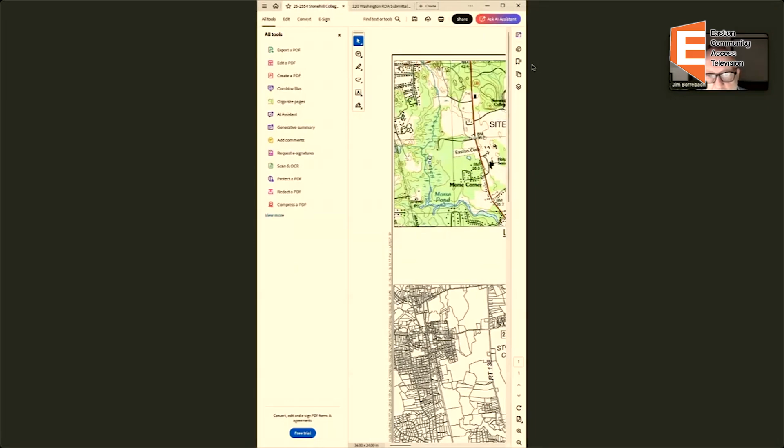Thank you. Is that visible to everybody? Yes, but you'll have to zoom in. Is that good? So I can see the locus map, but if you wanted to show us details of the bridge, you'd have to move your screen to the right a little and zoom further. Uh-oh. Now my Zoom skills are being tested and noted to be coming up short. Not noted, we do this most meetings. Can you see the plan as well as the locus map at this stage? I see the plan, yes.

Okay, so off to the right is Francis Hurley Way. That's where we'll be getting access. You can see the footbridge is right where my cursor is showing. There's a couple of existing abutments on each side. The BVW is from Mass Mapper, and we showed the 100-foot buffer zone. It is in flood zone A, as you can see from the plan.

So the bridge would be reconstructed with wood by hand. There was a couple of small areas where some asphalt had been pulled up as part of the initial work for this narrow section. We propose to replace that at the pre-existing grade, so no fill would be placed inside as part of the work.

We're showing erosion control extending a little bit further on the Francis Hurley Way side, since we'll be accessing the work site from that location. The erosion control barrier would be installed prior to starting any work. We're showing it overlapping the end of the abutments, on the landward side, by a couple feet so that we don't have gaps there. We use the town's detail for the erosion control barrier. We're requesting that you folks issue a negative determination.

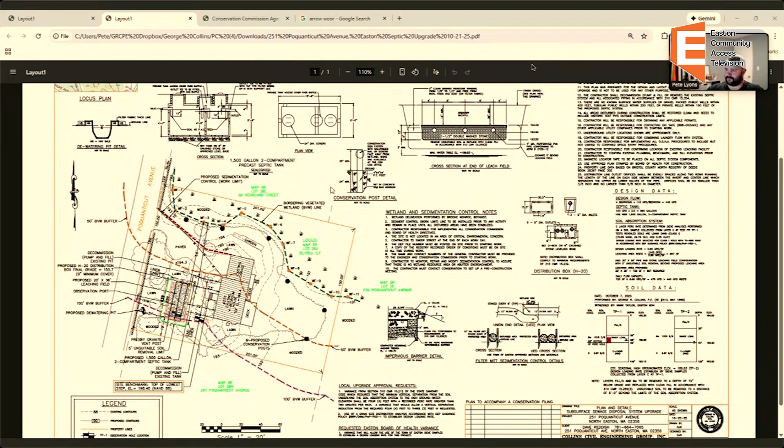Good evening, can you guys hear me and see my plan tonight? We can hear you and see the plan. For the record, Peter Lyons with Collins Civil Engineering Group. We're here tonight for a notice of intent relative to the repair of a failed septic system at 251 Poquanticut Avenue. I'll zoom in on the plan, and we can see the rectangular property with wetland flags 1 through 11 delineated on site to the north of the lot.

The 50-foot buffer basically bisects the property, and the 100-foot buffer falls down on the south corner. Our proposal is to replace the existing septic tank with a new 1,500-gallon concrete tank to a 20 by 36-foot leaching field, which would not be a pump system, but a slight elevation change of approximately 1.5 feet above existing grade. To accommodate the new leaching field, we're looking at removal of one larger tree, about 15 to 18 inch diameter, right in the middle of the system, approximately 75 feet from the resource, and some minor vegetation clearing, overgrowth creeping into the lawn at the southern end, outside the 100-foot buffer.

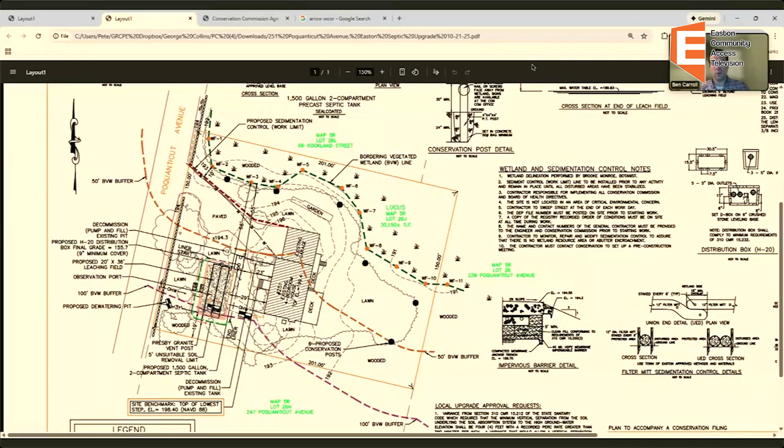Seeing none, Pete, I assume you'd like to close? Yes please, motion to close the public hearing for 251 Poquanticut Ave. Second. Crossman, second, thank you Nate. Carroll, motion; Crossman, second. Roll call vote: Carroll aye, Crossman aye, Goodman aye, Spady aye, Vecchio aye.

Motion to issue an order of conditions and permit for work for 251 Poquanticut Ave. Vecchio, second. Carroll, motion; Vecchio, second. Roll call vote: Carroll aye, Crossman aye, Goodman aye, Spady aye.

Up next is 10 Lantern Lane, which is a notice of intent for deck construction.

All right, that one is me again, let me pull that up. For the record, Peter Lyons with Collins Civil Engineering, representing the homeowner at 10 Lantern Lane. This would be the third somewhat recent NOI on this project. We just closed out the last one for replacement of the septic system and some site work, including a new driveway. Part of the old proposal and COC issued in the fall was a significant amount of plantings and getting the lawn in good shape. I think the owner has done everything above and beyond to meet the satisfaction of the commission as far as the existing state of the site. They are coming back requesting a 12 by 14 foot deck on piles off the back right of the property, just inside the 50-foot buffer.

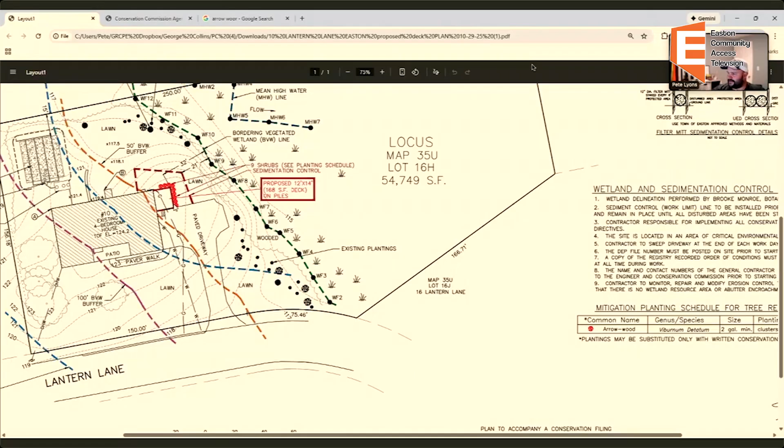The waiver that was submitted, due to the work and the placement within the 50-foot buffer, describes the public good section here. Give me one second. What do we do with this? Basically, the public good is this area - it's going to be an outdoor area to promote social gatherings.

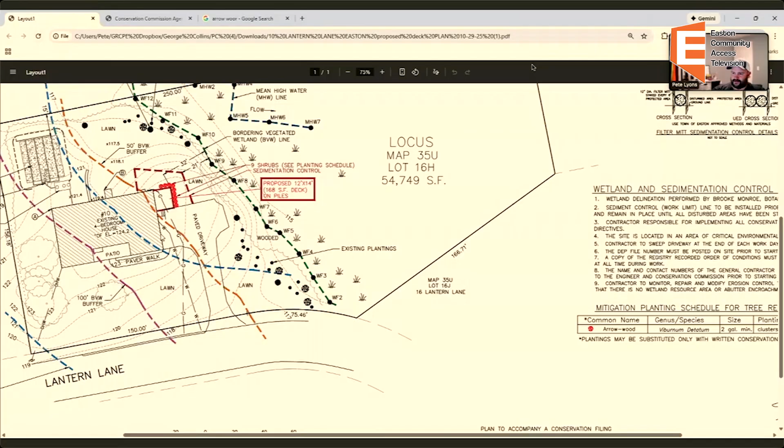Also getting people outside, out of the house and into nature is kind of the thought of this. With all the recent plantings, it's turning into a beautiful property, with the new stuff as well as the wooded area behind it. So the client's just trying to utilize the existing yard, but also take advantage of the nature that they're placed in. So that's kind of our comment as far as the public good.

There are existing conservation posts already on site, so we haven't proposed any additional. We feel what's out there is sufficient. All existing and new plantings are shown by the black dots on the plan. Larger trees are the larger symbols.

If anyone's been out there recently, I think you'd all agree that the site's in good shape. So we're hoping for approval with this project. And that's what I got for you. Any questions, concerns from the commission?

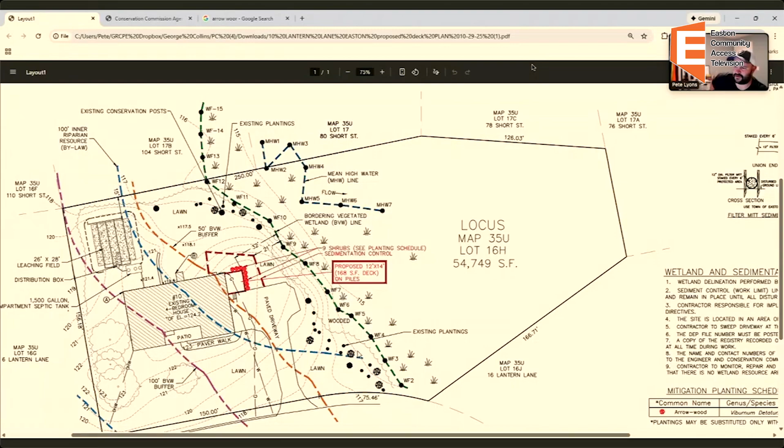Is this our second or third notice of intent here? This is the third. We did one for the septic, then we came back for the driveway, and some other little site improvements. But yeah, this would be the third now.

I don't have any questions or comments. I think it's a small deck. I think the mitigation's appropriate as the public benefit. Jenn, do you have any staff comment here? I don't. No. Looks good.

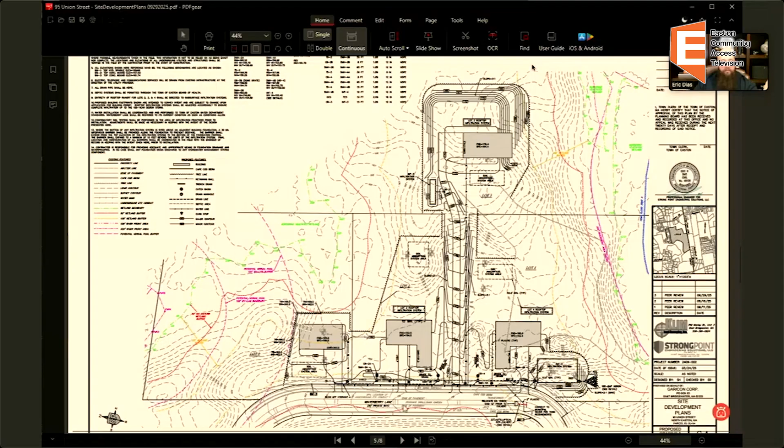So the first one that we'll talk about is the common utility work, which let me just zoom in and show everybody what we're doing.

You'll have to forgive me, for some reason my computer's running rather slow tonight. It's loading, it's coming, it's getting there.

So what we proposed is a collection system, a runoff collection system across the frontage of the property. There's a couple of catch basins, a couple of trench drains at the driveways. Our intention was to isolate our stormwater entirely from what happens on Winterberry Lane right now.

All of that discharges to an infiltration system located here on Lot 4. There is a water quality treatment unit before that, and everything's been peer reviewed already and passed with flying colors. The majority of the work in the buffer zone associated with this starts where my cursor is right here.

And goes to where my cursor is right here. All of that is in a buffer zone that's cast from a BVW on the opposite side of Winterberry Lane. So we have a street dividing us with curbs and a median, which helps protect that wetland. Additionally, the vast majority of this work is already in disturbed areas on the shoulder of Winterberry, which is good.

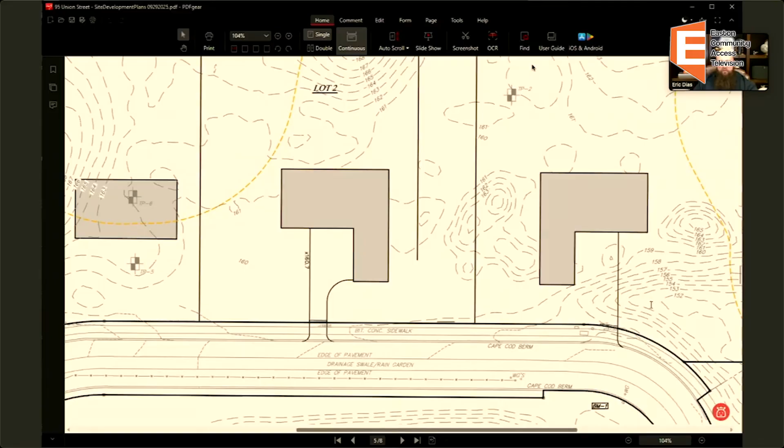All it is, is a cut through of that median, just a little paved area within the street that's there already. And there's only a very little portion of it that clips the 100-foot buffer zone in this location. So there's really not much.

The other buffer zone disturbances associated with this have to do with the infiltration system on Lot 4. It is approximately 1,255 square feet of buffer zone disturbance. It is obviously on the outer side of the 100. I think our closest disturbance to the BVW is just over 70 feet in that location.

And the remainder of buffer zone on the site, with the exception of Lot 1, is going to remain undisturbed, is the plan. So really, in the grand scale, it's a very minor disturbance that's proposed in that location.

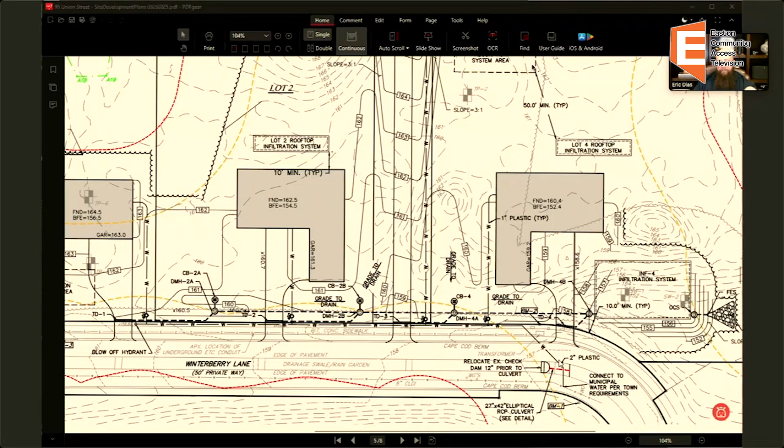I think I just grabbed the wrong thing here. There we go. So really, those are the finer parts. We're going to be bringing water and gas across the median, but that will be brought across under the cut through that we're doing, to minimize any disturbance within that median, because that median also serves as a stormwater function.

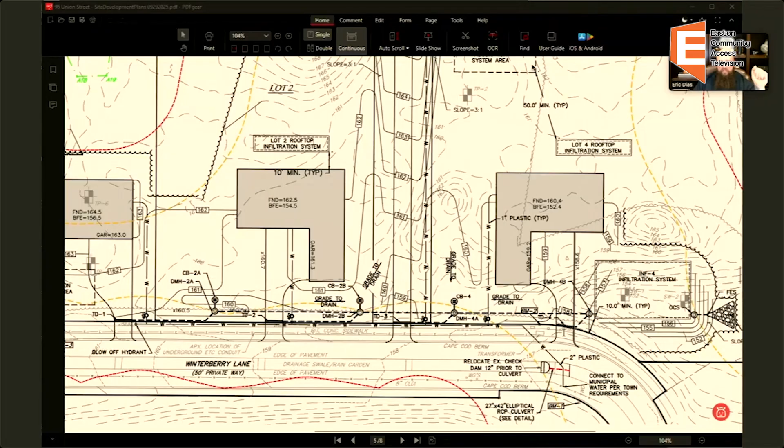And aside from that, the only work we'll be doing under this notice of intent is cutting in the mouths of these driveways. What we'll likely do is come in off the road 20 or so feet, cut those in, so there's a nice clear path for people constructing houses to get off the road, get into the site, and go from there. So really, that's it on this one, and I'm glad to answer any questions.

Oh, actually, that's not it. One more thing. When we were before you for the ANRAD, there was some note about a path that has eroded on site into the stream, and a violation notice was sent after the ANRAD proceedings, and we understand that has not yet been addressed.

So what we have proposed as part of this is a condition that would require that work to be addressed and taken care of to the satisfaction of the commission or its agent, prior to the estate lot being issued a building permit. So that gives a lot of skin in the game to make sure that gets done.

And the other thing I wanted to bring up, I realized this as Peter Lyons was talking, who was up just before me. On this particular one, I neglected to include conservation markers along the limit of disturbance on lots 2, 3, and 4. So I'm just going to agree that we're going to put those in as part of this, and we can touch up a plan and get it back to you folks to show those locations.

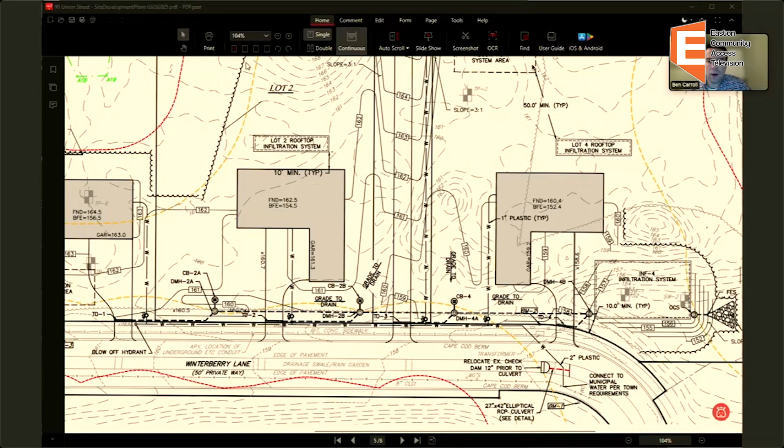Sorry, my mic was off. No, that makes sense, Eric. Jenn, do you have any staff comment you'd like to start with?

Yes, a couple things. We do not have a staff report or a site inspection. The filing fees didn't actually get paid until late last week, so we would need to continue so that the staff work can be completed.

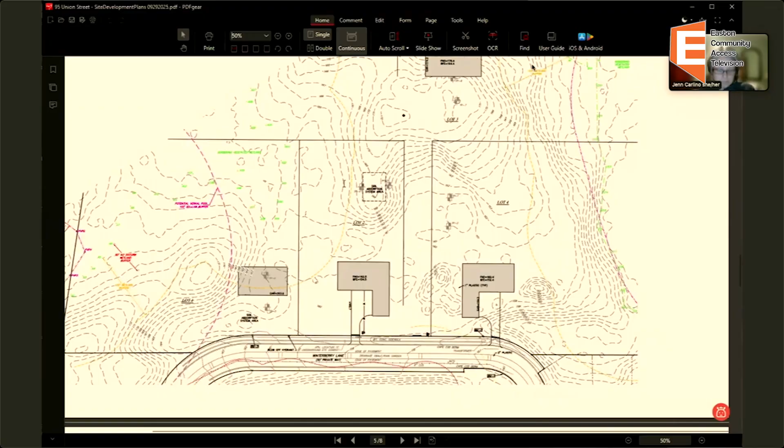The gravel in the stream is a violation. It was noted as a violation separate from wetland permitting and needs to be addressed. It should have been addressed in July, but it needs to be addressed immediately and before you close the public hearing, in my opinion.

We'll just note that it looks like there are separate infiltration basins on each lot that would also help take care of stormwater. I'm not sure if you mentioned that, Eric. I was busy taking notes. Yeah, I actually didn't mention that, and I should have.

Lots 2, 3, and 4 each have rooftop infiltration systems that will collect and recharge. If I recall correctly, it's the entirety of the 100-year storm. Lot 3 also has a smaller one to pick up a small portion of the driveway, which gets picked up in a water quality unit and infiltrated outside of any buffer zone. So there's a good amount of infiltration going on this project.

Thank you. Eric, was that all part of stormwater? It was all part of the stormwater review with Beta, yeah. That makes sense, that was actually my question too, what are we doing with the roof runoff? Questions or comments from any other commissioners?

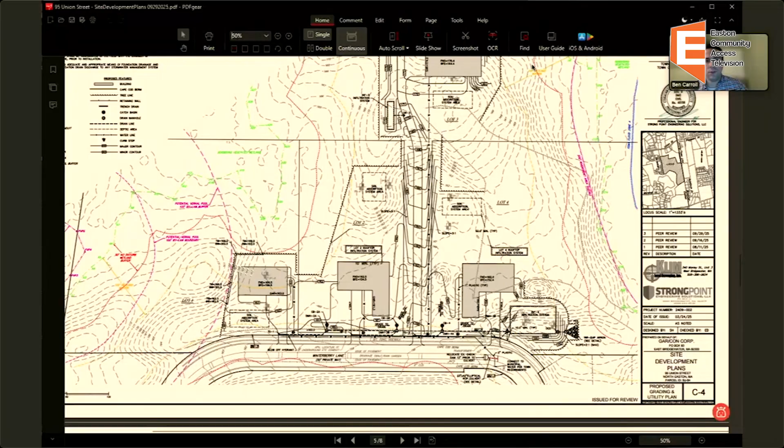All right, seeing none. Any public comment here for 95 Union Street? And again, this is the portion of the project just affecting driveways and utility access. We do. I'm promoting Roy.

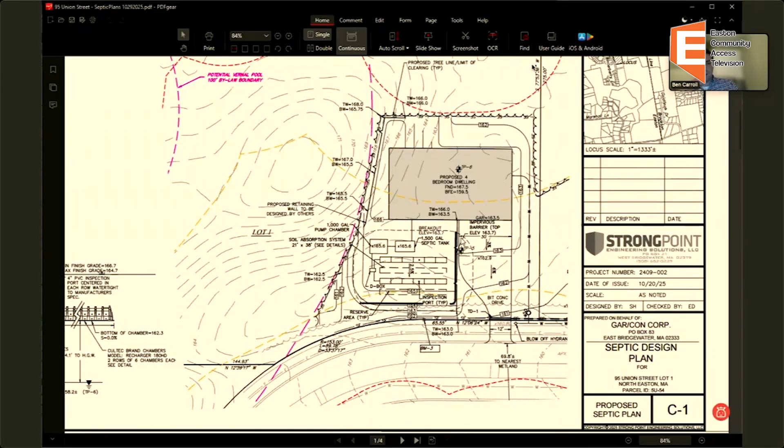I'm sorry, the yellow dotted line in the middle of the house, that's the 100-foot buffer? That is the 100, correct. Which should be more clearly labeled, so I'll take care of that too. And I'm sorry to ask, Eric, but could you just point out where the vernal pool buffer is? I just want to make sure I'm looking at the right thing.

Yep, absolutely, let me zoom out just a little bit. So the purple lines that you see here, this outer one is the 100-foot bylaw buffer. And then the bylaw boundary is this inner purple line that you see right here. So the vernal pool itself is actually just off of this property, just over the property line. But again, we obviously respected those buffers, so you've got quite a distance there. Yeah, we're 200 feet away from the delineated edge.

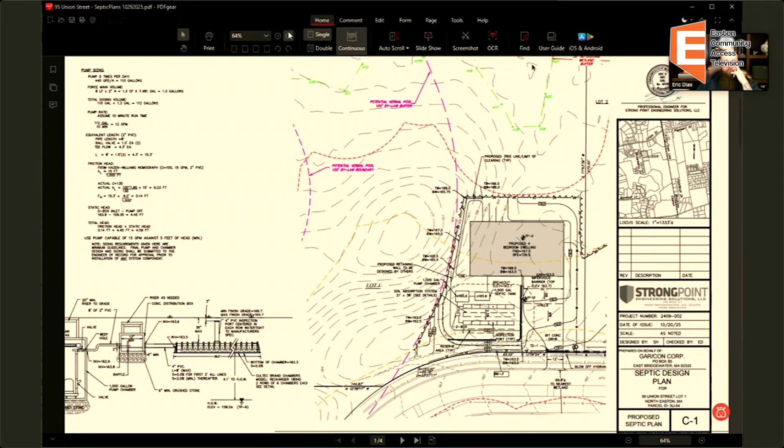I don't have any additional questions. Any comments or questions from other members of the commission? I just want the vernal pool buffer zone markers added. Yeah, let me add those to this one too. I apparently don't know what I'm doing at this point.

So the same comment as the last one: the filing fees were not addressed until late last week, so there's no staff report or site inspection yet, so I would need a continuance for that. Okay, and I think I just have a layer issue going on where those didn't print correctly, so I'll get those on a revised plan and back to you folks before the next meeting. Thank you. Sure, any other questions or comments from members of the commission?

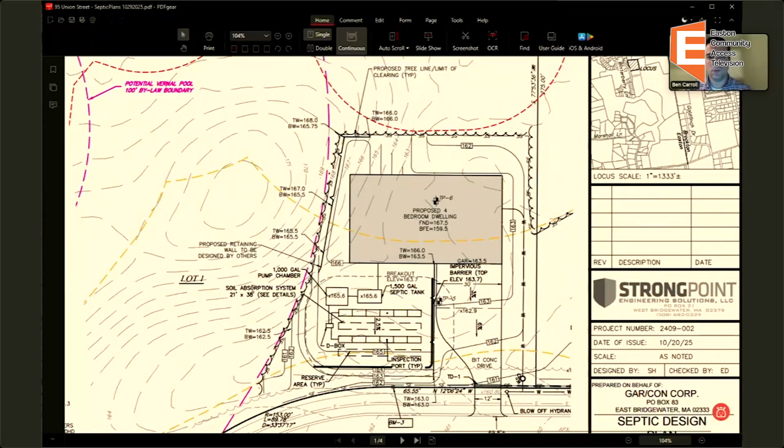Seeing head nods. Any questions or comments from members of the public? Nope. Seeing none, Eric, I assume you'd like to continue. Yes, please. Loaded question, I know.

Motion to continue 95 Union Street, labeled as Lot 1, to be located off of Winterberry Lane, to the 12/15/25 meeting of the Easton Conservation Commission. Second, second. Carroll motion, Goodman second, roll call vote: Carroll aye, Crossman aye, Goodman aye, Spady aye, Vecchio aye.

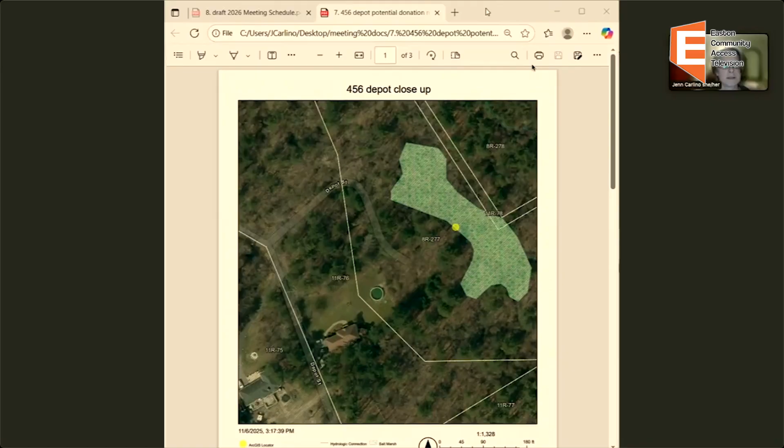Let me see if I can share the screen. Are you seeing the map? It looks like it's loading. We got it, okay, and it's a little funny on my screen. Is it big enough? Can you see the whole thing? Yep, at least for me.

Okay, so this is the marker. This is the whole property, not the whole thing because it's cut off, but this is the property in question. You'll see there looks like there's an old road, and there was possibly either a house proposed or a house here. You'll also notice a portion of the property is lawn with a pool on it. When I look at the plan they sent us, and this is sideways, the pool was here with the grass from the neighbor's property here, and you'll notice this old property line. So this is parcel 8, I think, and this is lot 7, and it shows the house. So I tried to do the site inspection last week.

Couldn't quite find the entrance, and I was really short on time, so I will need to go do another site inspection. But anything that's going to require us to try to get the adjacent property owner to stop mowing or remove a pool is really not something we have the bandwidth for. Are we sure that shape matches up? Could you just show me?

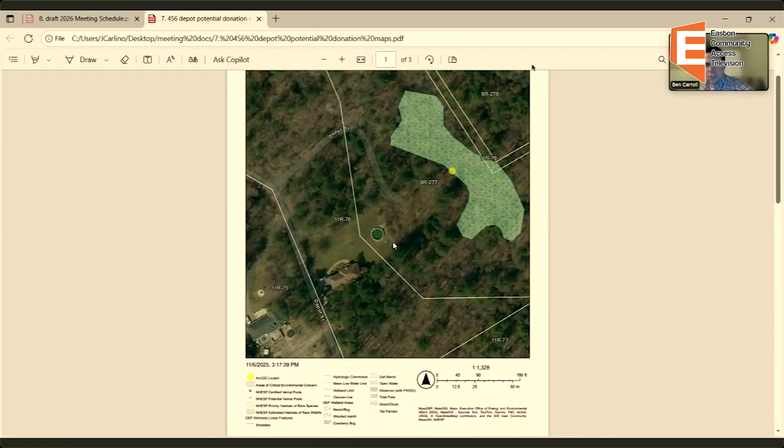Yeah, remember it's going to be sideways. So this is facing straight up. I hate to ask, but can you rotate that page on page 1? Yeah, let me see, okay. So then this is where the pool was, and then the lawn and the neighbor's house, and this is where the driveway came in. I mean, I believe you, it was just surprising.

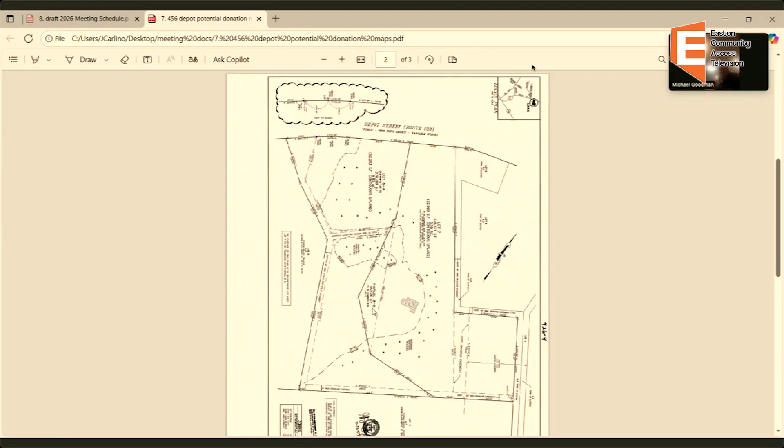Yeah, so I do have to do a site inspection, but I guess I just wanted to point out this section, right? So if there's no driveway and no house there, then I would think lot 7 is desirable, but this lot 8B is less so. And now I have to try this again, I might have to do this three times, sorry.

And what do you think, Jen, the approximate acreage is on it? I looked at it quick on MassGIS before the meeting, trying to make sense of it. What do you think, roughly?

I don't know off the top of my head, Mike. That's a good question. I looked at it, I think it said 4.9. I might be incorrect. My first thought is the MassGIS is always, not always, but I've seen them be just way off compared to certified site plans.

It's funny sometimes, like Jen said, till you get out there, you look at it online or NHESP, and then you get out in the field and you say, huh, interesting. So I totally get what you're saying, Jen, about us essentially getting into an adversarial situation, might be how to put it.

I wonder if there isn't a way to just fix it in a deed, right? Well, no, I don't think you could, because Chapter 40, Section 8C says that conservation property is for natural resource protection. It wouldn't have someone's private property and a pool and grass on it. But it's not conservation property yet, right? Correct, but I think you would have to carve out this section of the lot.